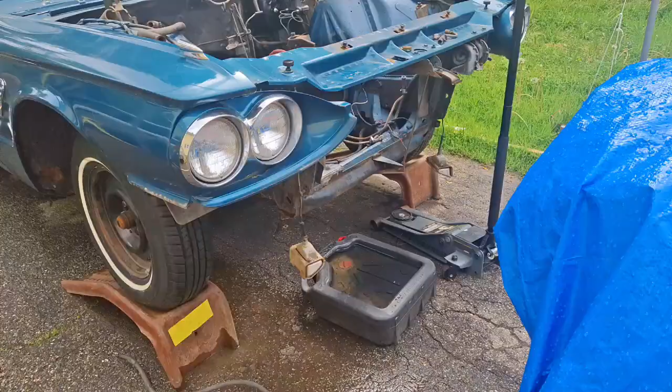We got a little side project to do today that hopefully we can get into. My wife's one of her clients is a lawn care guy, and he agreed to show up and knock it down. We can't afford to keep doing that. A big batch of parts and pieces are showing up for the big 390 here tomorrow, but that don't help us today much. It's been raining just steady.

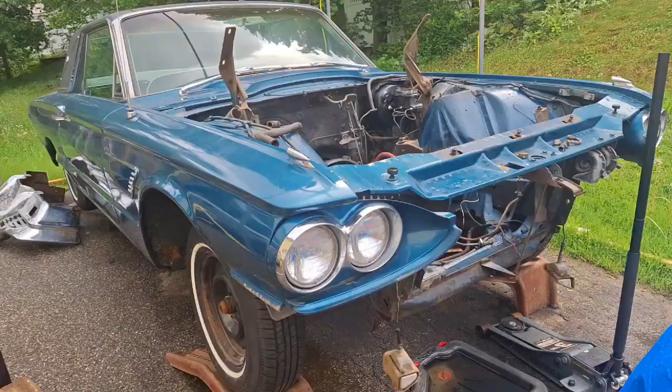So yeah, we got other bridges to burn. Today's level of 'Jesus, I don't want to do this' is we're gonna try and row this Honda engine off this Husqvarna and see if we can't start getting it taken apart so we can get the crank out of it and get the crank replaced. Turns out they made like four different cranks for different manufacturers. So let's see if we can't get this thing out of here and somewhere we can work on it, and we'll move forward from there.

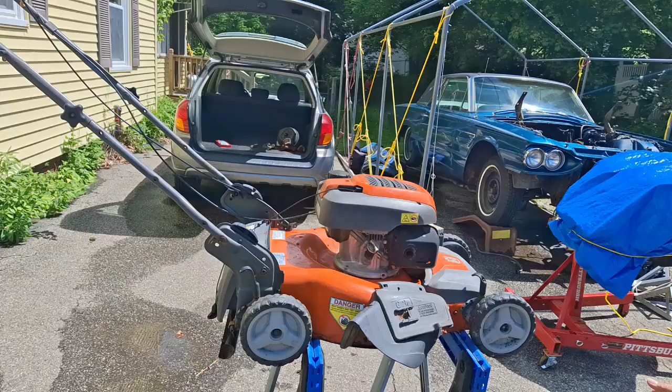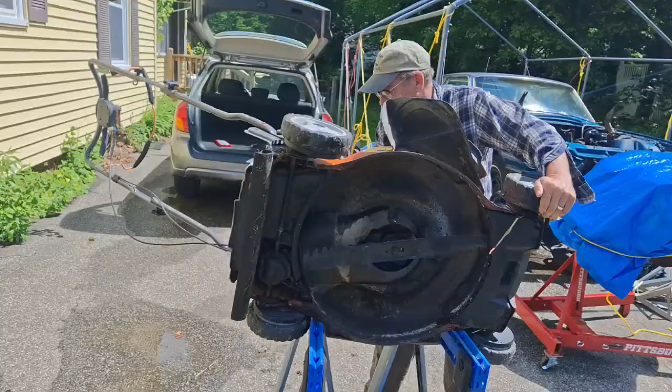Alright, so we got this old bird up on our makeshift stand here. See if we can get it kind of stabilized on its side here. Let's go right straight upside down.

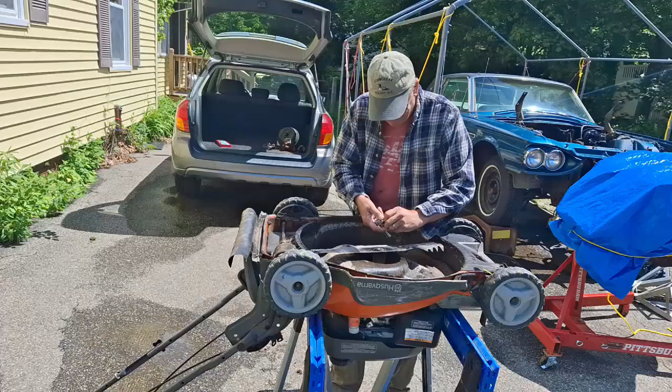See if we can't get this busted off here. Well, that wasn't very tight. That busted off. That is apparently not the right size.

There's something else over here, maybe. Oh, nope. Up on top. You know what, bust this handlebar off here. Ah, screw it, it's not.

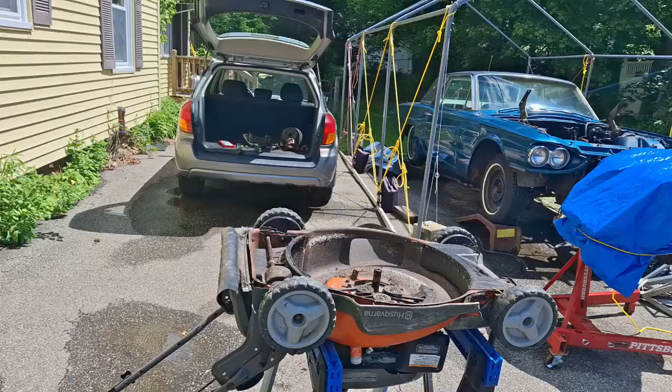That might be an issue, huh? Can you guys see that? Yeah, it cleaned them right off. That's supposed to be the little dogs that hold that on there. You guys see that?

See, she's kind of bent. All right.

Oh, how do you think? Do you think there's only 3 bolts that hold this engine on? Should we go ahead and... let's leave all that right just the way it is. I think it's just these 3 bolts hold the engine on. Let's see if we can't loosen them up.

That is not the size that they are. That is not the size that they are. Well, maybe it is. Okay.

Oh, that doesn't feel good. I wonder what this spring goes to. Tough telling, but I think it goes to this, as I recall. Oh, that's... Okay, well, we ain't gonna screw with that.

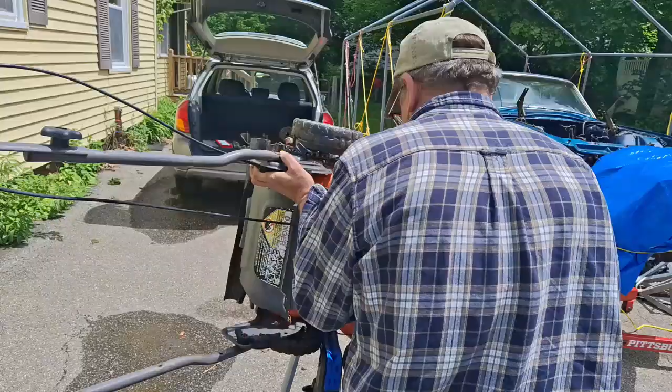Let's get this flip back over so that when I do take them other two bolts out, the engine doesn't go crash. Okay.

Alright, way to go. Way to go.

You watch, now that I've committed to breaking them all off, the other two will turn right out. Well, there's proof that I was wrong.

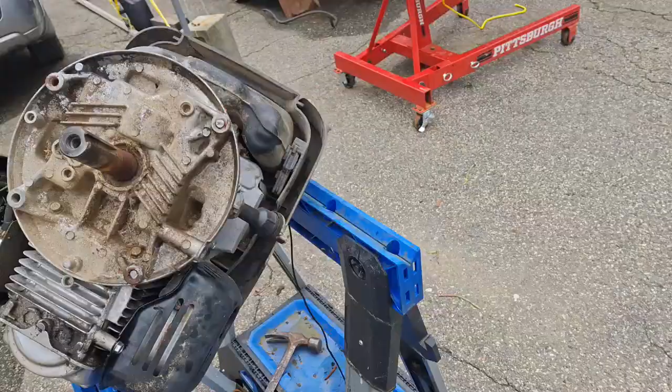And, yeah. All right, now that we got this thing off, let's take a closer look at what we got here. I'm gonna have to drill out that, and helicoil those two spots.

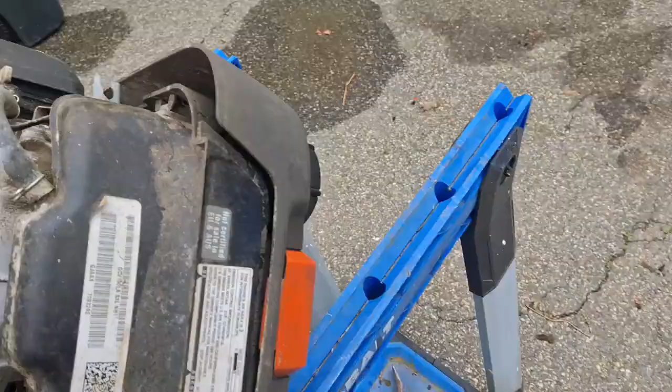I got one that come out. It looks like the case cracks this way. Isn't that odd? So I'm gonna need a new gasket for that.

I'm not sure what else I got going on here that has to, maybe I can just split it here, slide that out, well.

Let's go online first and we'll go shopping a little bit. We'll see what we get for a crank here and what that's gonna take.

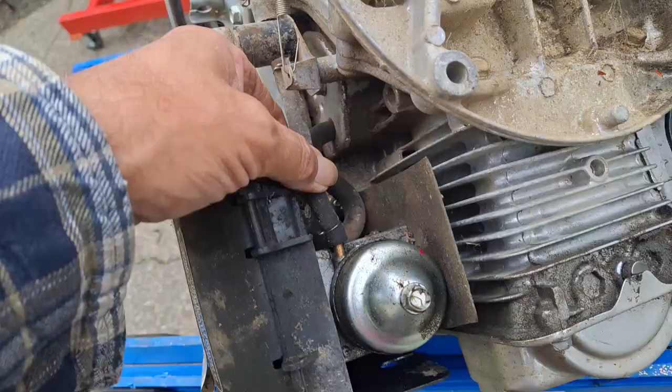Maybe I gotta strip this thing all the way down. I don't know. Yeah. This ain't my forte, this newer stuff. But...

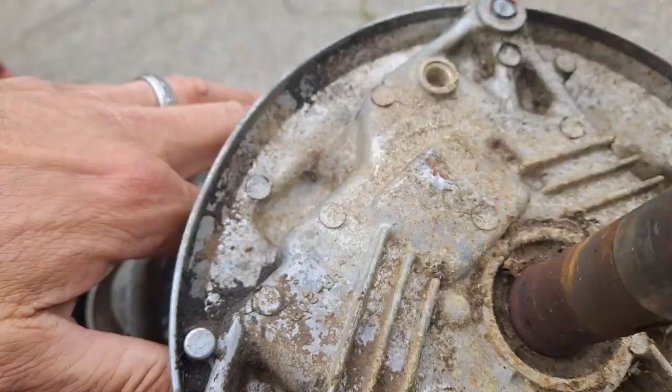I bet you I can probably get those two. Just like that. That one I can definitely get. This one is in here. Now, that one doesn't, oh, that one right there.

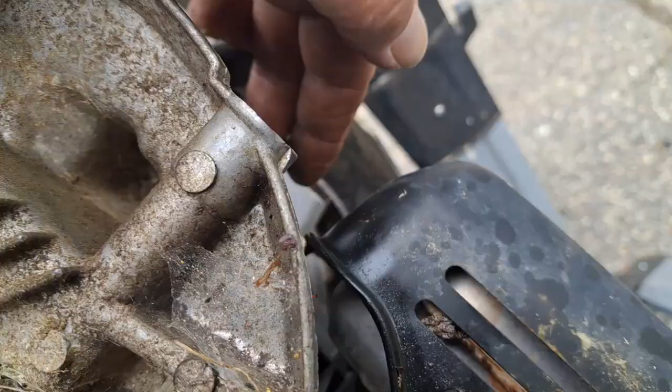I wonder what that hole going right through is. That's maybe not a good sign. These two. Oh, I think that might be it.

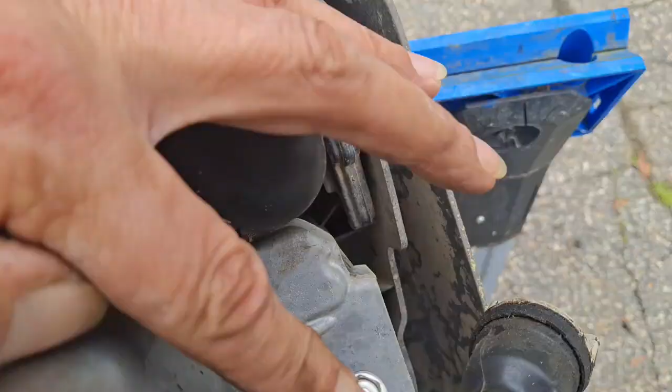These four on this side. And these four on this side. And I'd have to take this off. So this is the governor. All right.

Let's get this stowed up onto the porch. I'll get a box to put all that stuff here in.

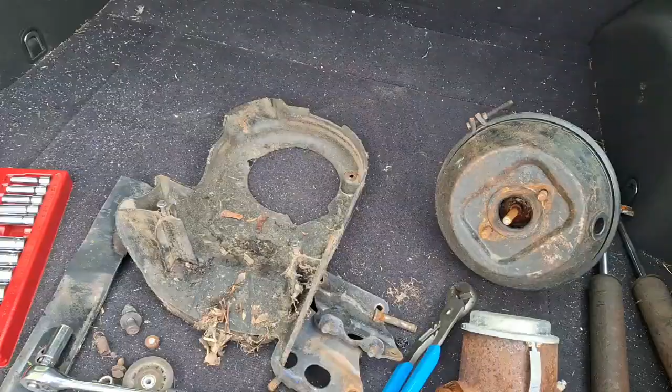Pick up my tools, do a little bit of internet research, and see what kind of grief we can get ourselves into here. That's what we're doing next. We're picking up and cleaning up.

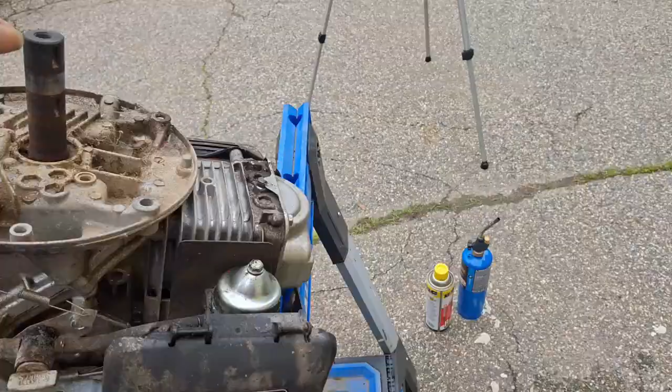Geez, it'd be so much easier if they still made these things. I'd just, you know...

I'm guessing I'm probably going to be about $250 into swapping out this crank. That sound about right to you guys? This is going to be 1.5, another half, plus miscellaneous junk stuff, stuff I found, not yet found, that's broke. I'm thinking 2.5.

I wonder if I could just get a replacement engine for this for that same price. Alright, well, let's put this aside and we'll move on from there.

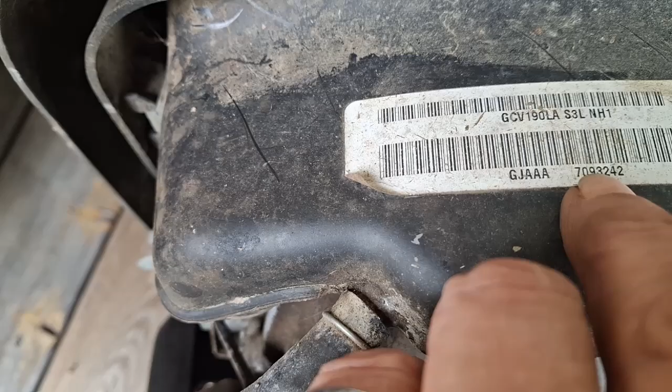Just so we're all on the page here, this is a GCV190LA space S3L space NH1, serial number GJAAA, looks like quadruple space maybe, 7093242. So let's go do some parts and pieces lookup and see what we can figure out.

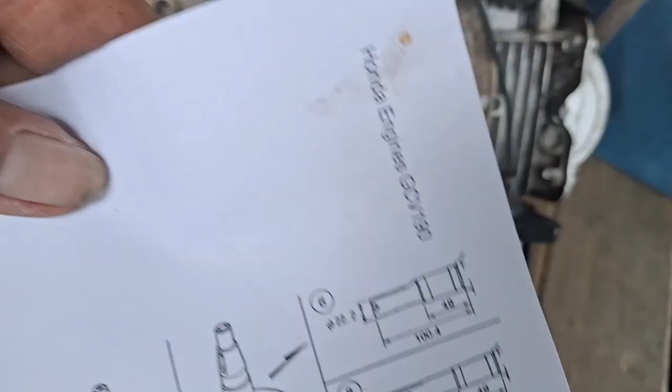Okay, on Jack's Small Engine - no affiliation, hashtag not sponsored, I guess - we find that there are 10 different crankshafts. I assume that all these measurements are metric.

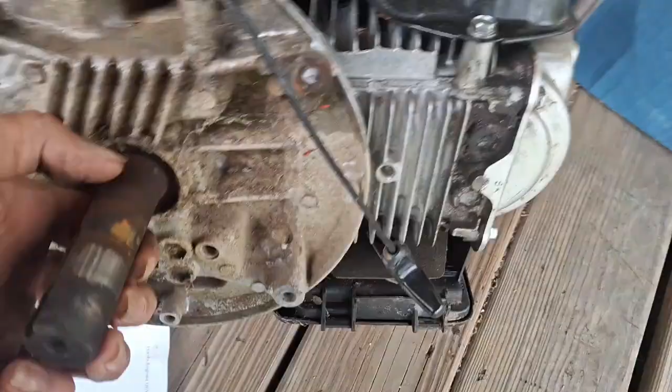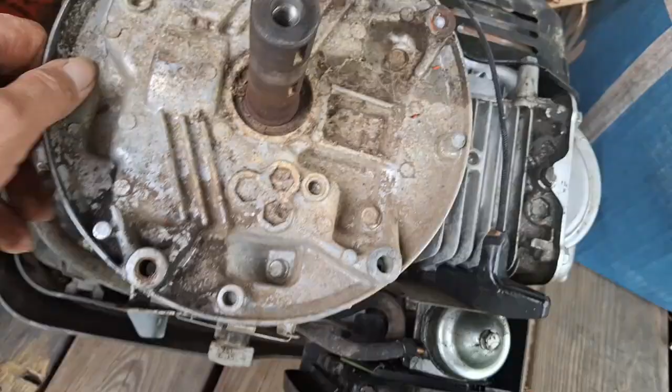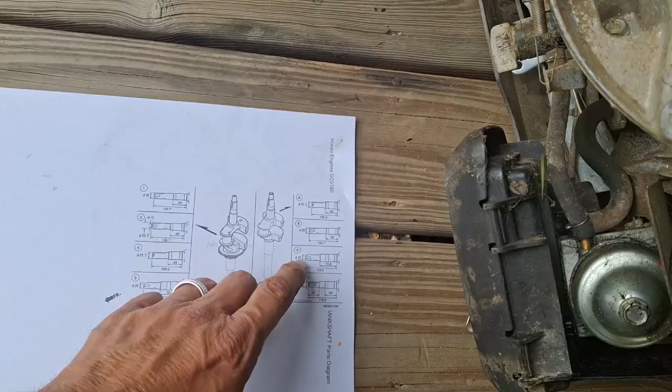Which one do you think we have? It's got 2 woodruff keys on this side, right there. It's got a long broached key here. It's got a small step in it right there. There's no step at the end, though. Let's get that. There's no step at the end. Okay, so it's either 9... 2 woodruff keys, 2 woodruff keys, 2 woodruff keys, 2 woodruff keys, 2 woodruff keys. All right.

Let's go get a caliper and see if we can't get some measurements to match up. Well, I recognize that this is not the best set of calipers on the planet. It ought to be pretty close.

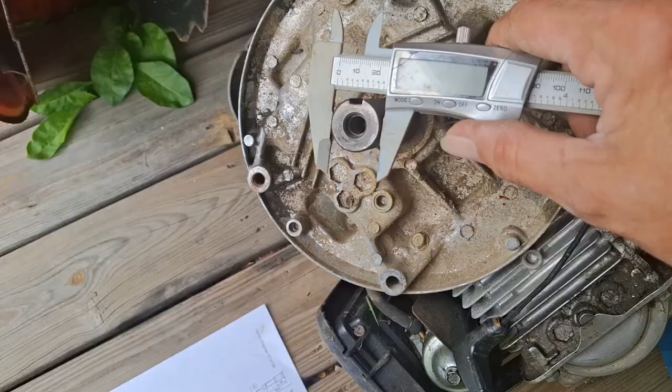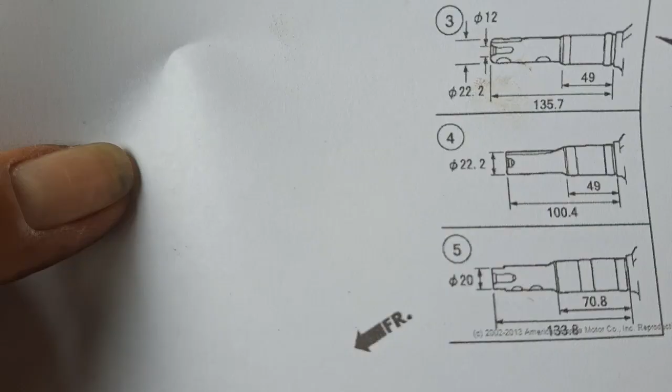All right, so what do we got for a measurement there? I'm pretty sure this top scale is metric. So it looks like 21, 2, 3, 4, 25 millimeters. So 24 and change. Do we have any on this that are... oh, that one's 25. 22, 22, 20, 22. Okay, so it's 25, 25. So we've narrowed it down to 2. We're either 1 or 8.

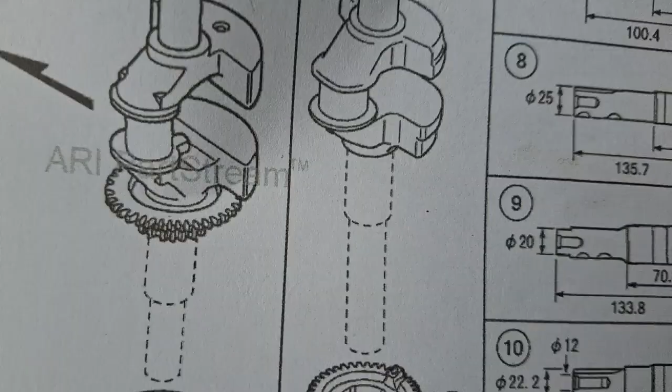I think it might be 8. Both overall measurements are the same. The measurements to this collar are the same. I don't see any other differences between 8 and 1, do you? 25, 49, and 135.7. 25, 49, and 135.7. Huh.